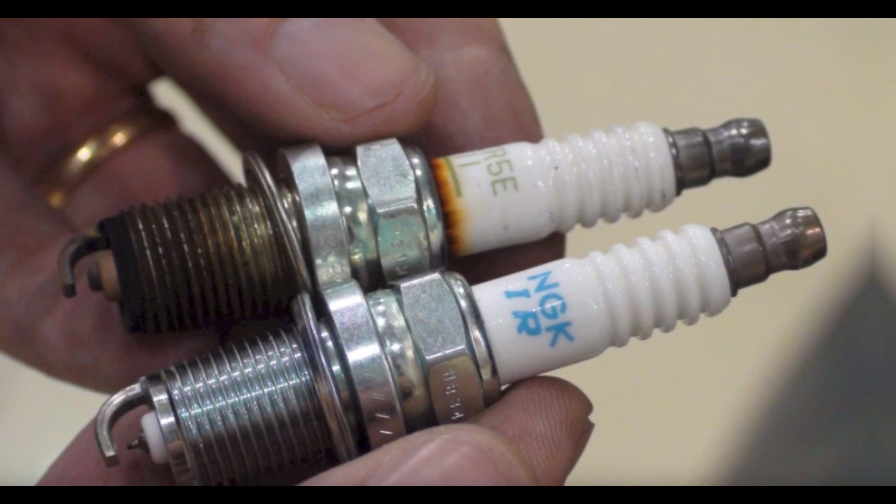Have you ever seen pen-shaped parts under the engine hood, inside the combustion chamber? That's the spark plug. Today, we will learn everything about a spark plug.

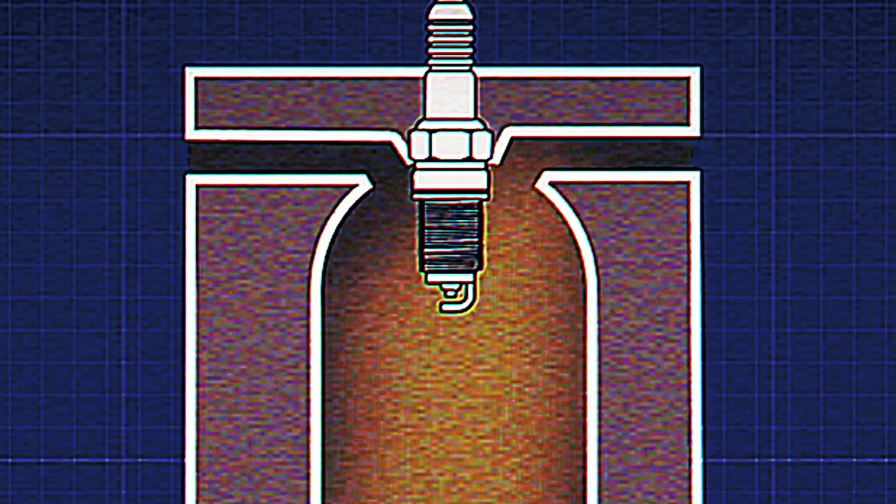Basically, the spark plug, as the name suggests, creates the spark needed for the ignition system in a gasoline engine. It creates an artificial bolt of lightning within the combustion chamber, or cylinder head.

Let's see how. Here is the picture of a spark plug, where at the top there is a terminal. This terminal connects to a high-voltage ignition cord. It has a universal design with a terminal nut for most cords, and it's also removable for incompatible vehicles.

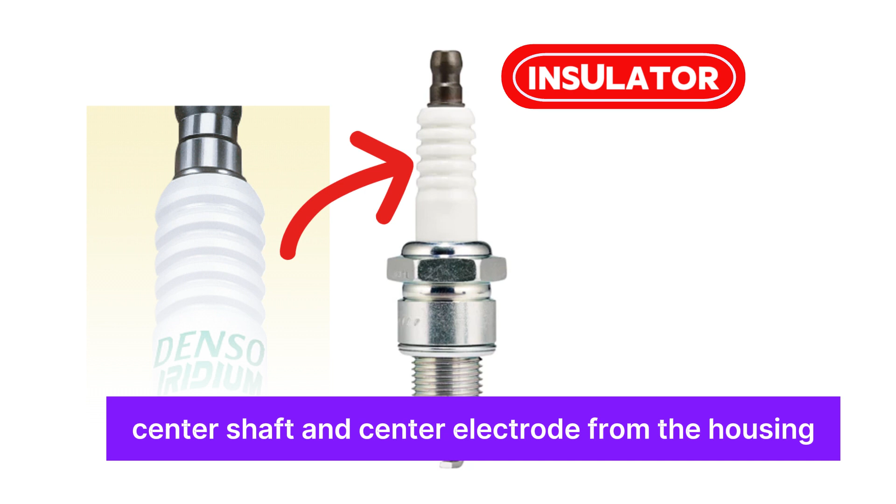Next, the white shield-type part is the insulator. It insulates the terminal, center shaft, and center electrode from the housing, preventing escape of high voltage from the electrodes.

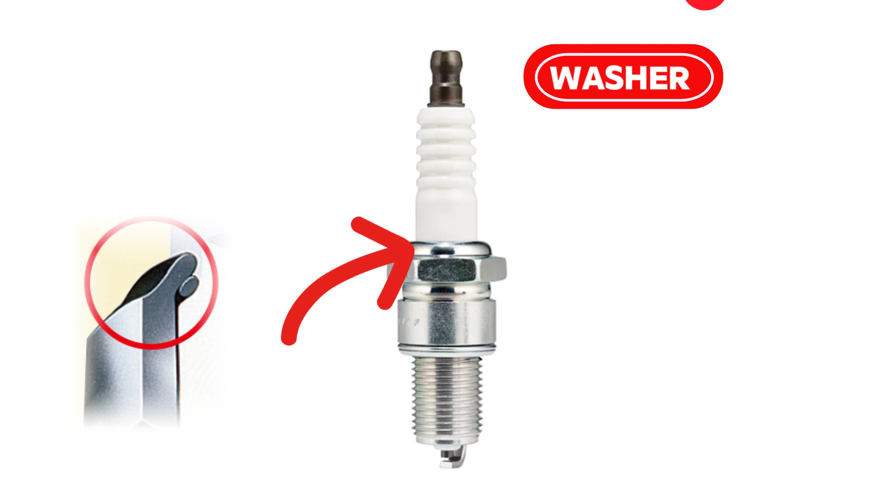Then we can see a washer, which makes the insulator and the housing fit tightly to each other. Then comes the center shaft, which connects the terminal and the center electrode.

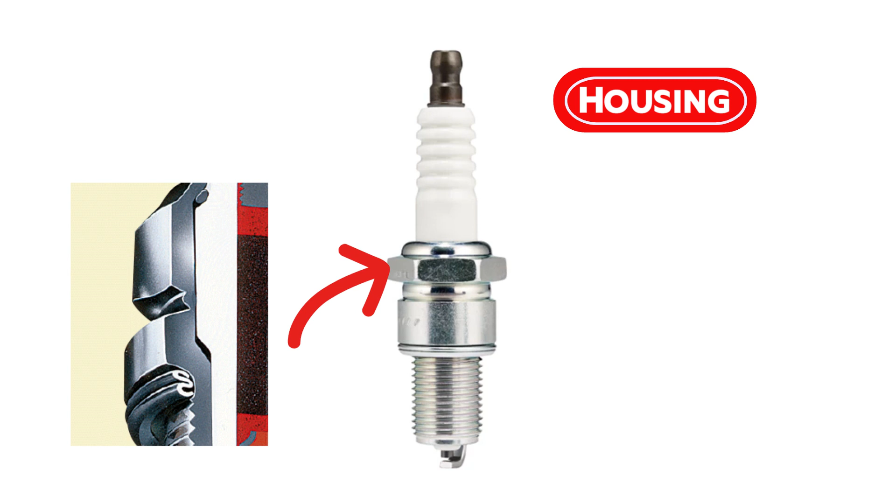This part is the housing of the spark plug. The housing forms an outer shell that surrounds the insulator, supports the insulator, and installs the spark plug in the engine.

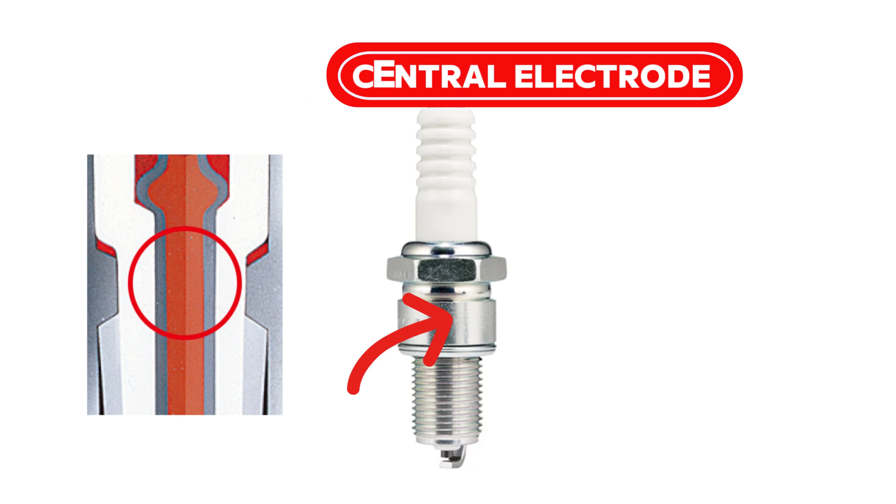Then, in the middle, here is the center electrode. A special nickel alloy is used for the center electrode to reduce electrode wear. Copper is sealed into the center section to improve thermal conductivity.

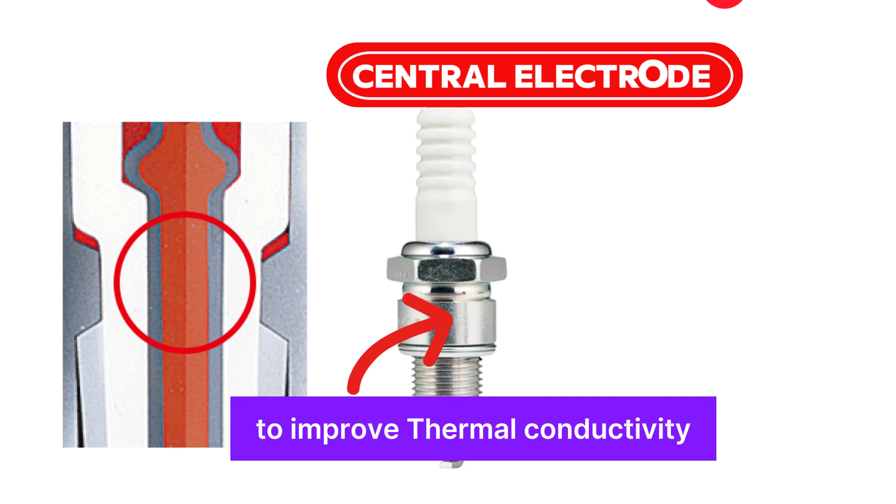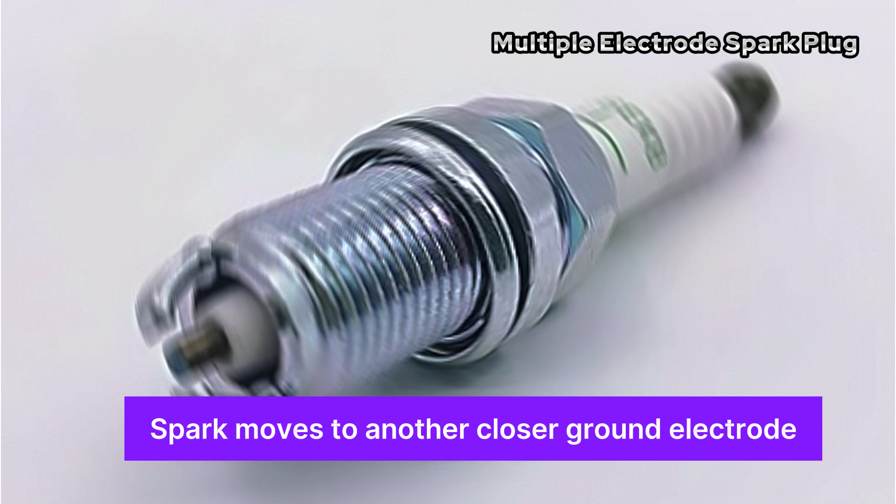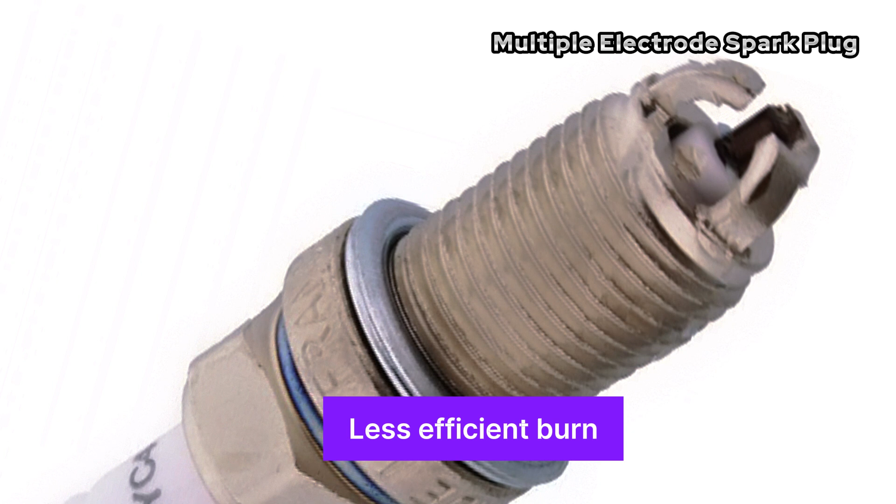Some spark plugs can contain up to 4 side electrodes surrounding the central electrode. Multiple side electrodes generally provide longer life, since when the spark gap widens due to electric discharge wear, the spark moves to another closer ground electrode. However, the disadvantage is that a shielding effect can occur for each electrode, leading to a less efficient burn and increased fuel consumption.

And at the bottom, this is the ground electrode. Nickel chrome material is used for the ground electrode, and various measures are taken with its shape to improve ignition performance.

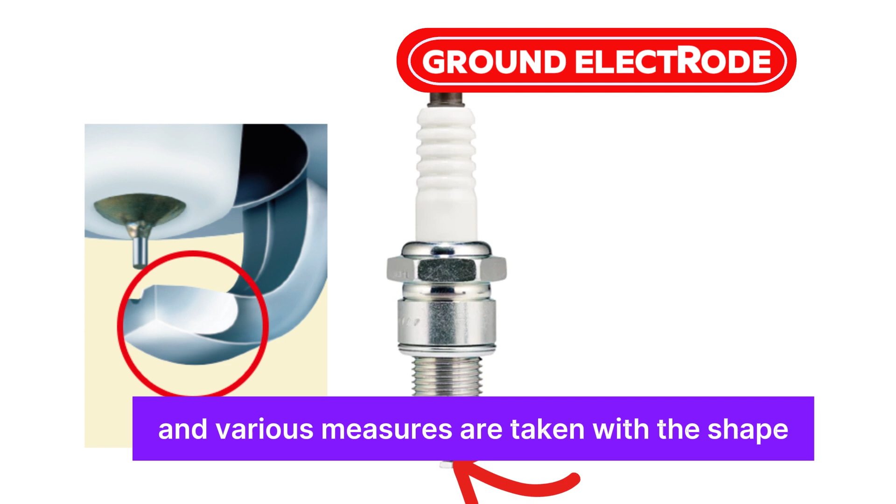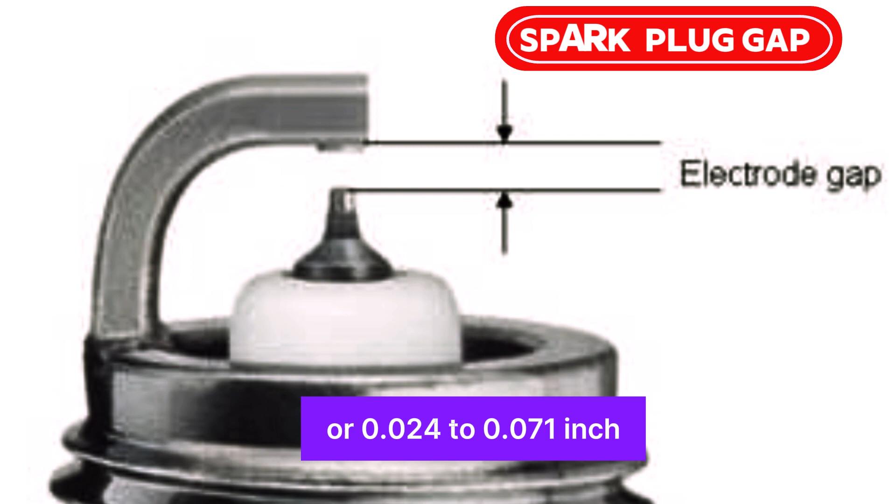Finally, we can see a tiny gap between the ground electrode and central electrode. This is called the spark plug gap, and this is very important. Spark plug gaps for car engines are typically 0.6 to 1.8 mm, or 0.024 to 0.071 inch.

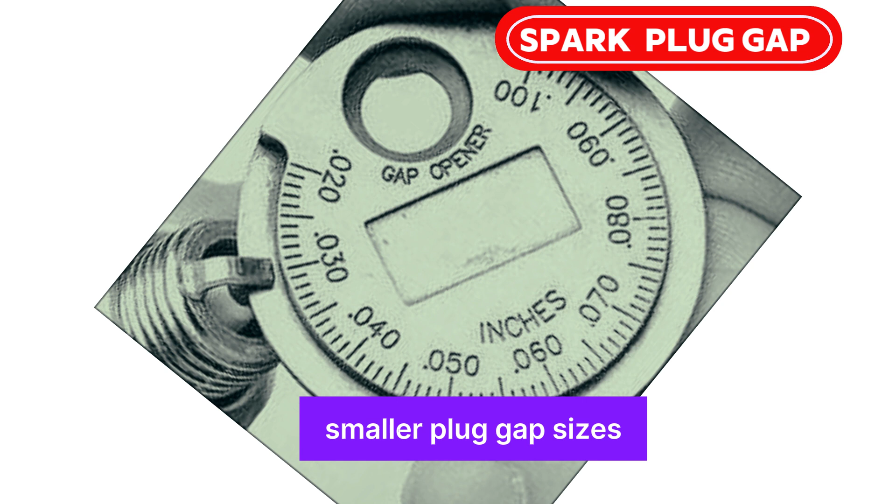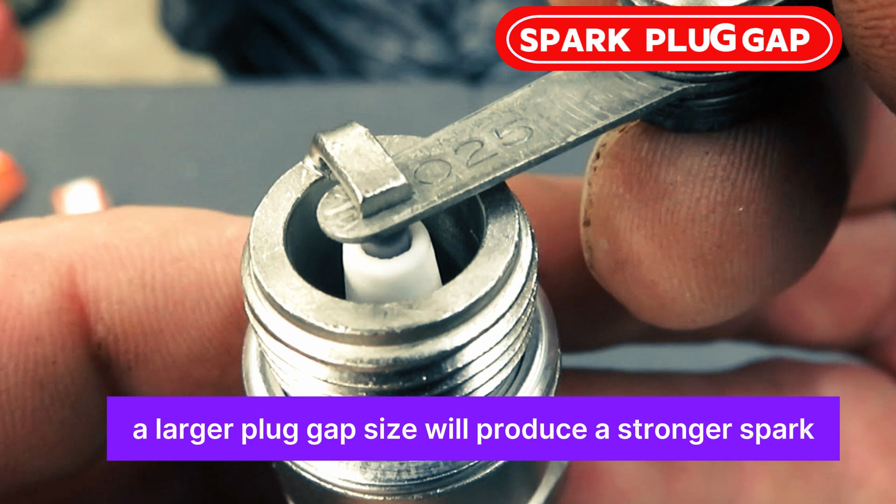In the next video, we will be exploring functions of a spark plug and many more. Till then, stay tuned.